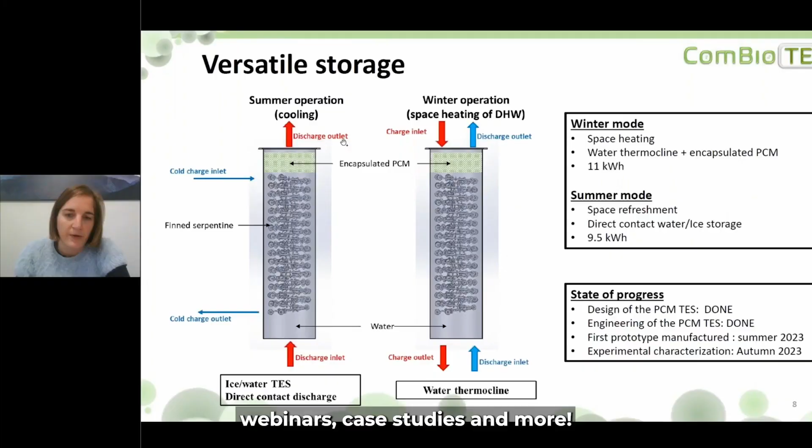Every month we focus on a topic that is key to making Europe's buildings as energy efficient as possible. Exploring that, you can find the latest content such as expert talks, webinars, case studies and more. From architects and engineers to academics and policy makers, we've got you covered. BuildUp brings together thousands of registered members to reap the benefit of Europe's collective intelligence on all aspects of energy efficiency and renewable energy in buildings.

The BuildUp portal benefits from the expertise of our ambassadors. Drawn from industry and academia, the ambassadors bridge the gap between EU and national level and help shape our editorial content. Want to promote your work? BuildUp disseminates your research, projects and events through a variety of channels.

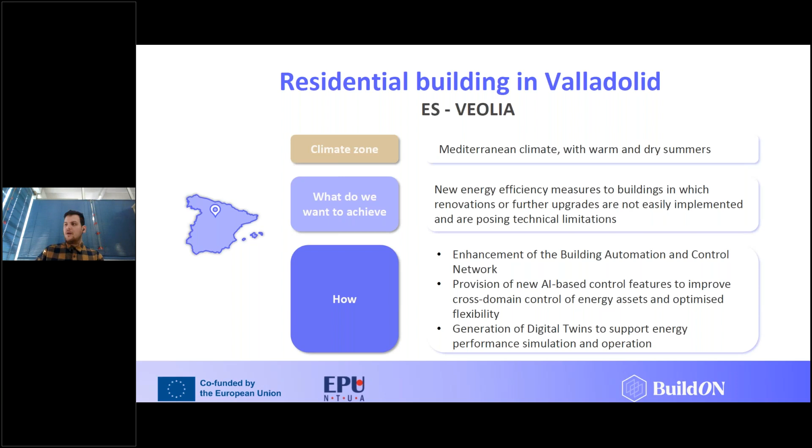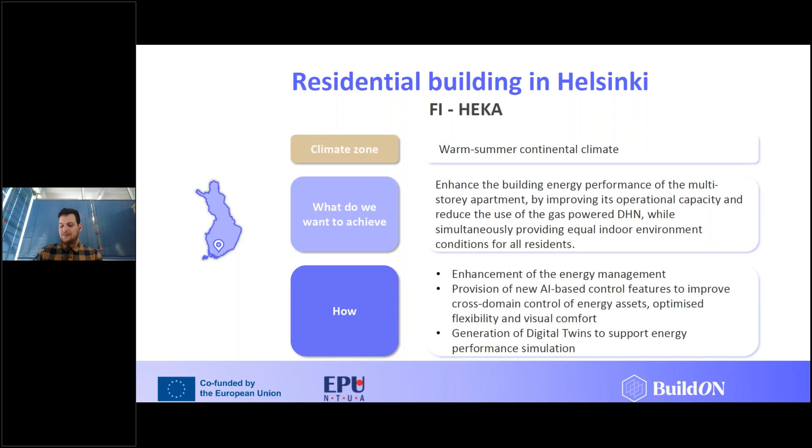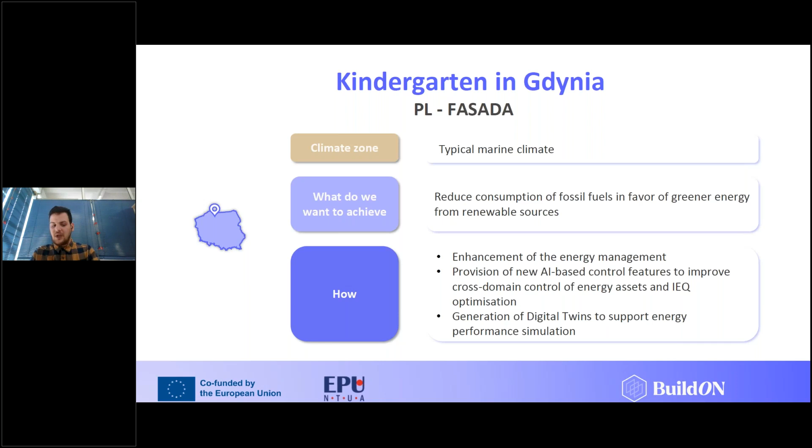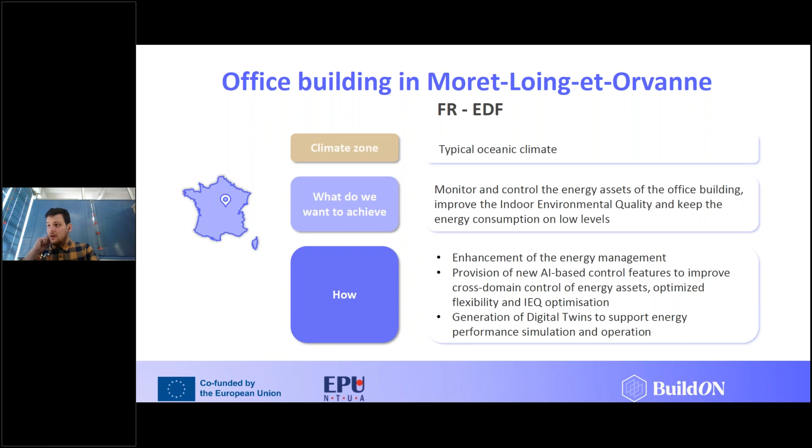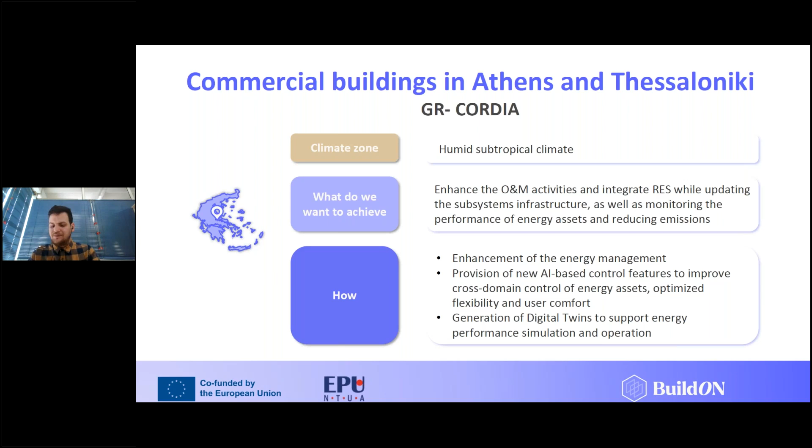A final example to make this easy: the energy profiling service is going to be deployed in each pilot. It's horizontal, but it has to be different with respect to the use case, the typology of the building, the stakeholder, the needs, the requirements. That means we cannot provide one service and that's it. We need to make it somehow 5 different services within the big service, and then be able to replicate it and say that this can be easily extracted, since we have a high TRL level, and can be deployed to other typologies upon the end of the project easily.

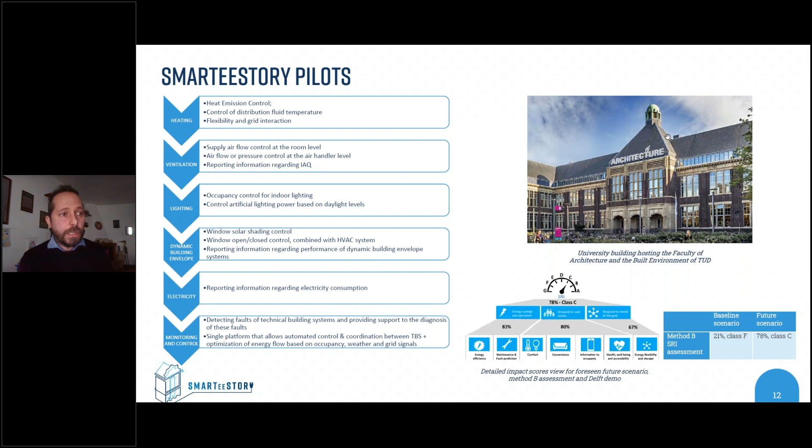All this will be orchestrated by our monitoring and control system. A specific optimization algorithm will be developed that takes into account all those instances, in order to find the best solution that is, from one side, economically viable, and also takes into account the comfort conditions of the end users.

The same will be done for the High Court of Justice in Granada. Applying the same methodologies, we are going to move from 12% class G in the baseline scenario to 72%, class C, in the future scenario, addressing five domains: heating, cooling, lighting, electricity, and monitoring and control.

As for this demo case, the physical intervention in the High Court of Justice in Granada will address both the heating and cooling system, currently provided by a centralized heat pump that can provide both heat and cool via air handling units. The idea is to develop optimization algorithms that take into account the different perspectives and needs of the users working there.

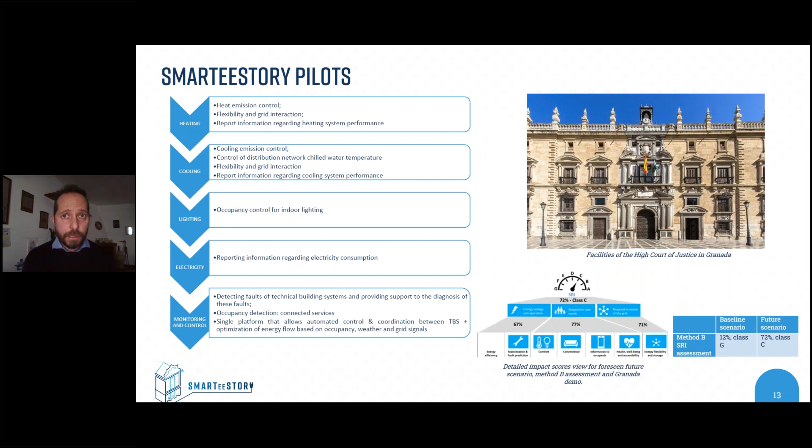This will provide a sort of flexibility to the systems that is quite important for the final SRI calculation. Lighting and electricity will also be included in this analysis and control algorithms, in order to have the end users' quality of working enhanced.

We will work on the heating domain with the possibility to control the radiators via thermostatic valves, but also the possibility to control the ventilation system that provides not only fresh air but also heated and cooled air. The cooling and heating system will be connected to the ventilation system to provide heat and cool to the users, to the workers in the building.

We will have some metering of the domestic hot water consumption, as well as for the lighting system. We will have sensors to detect the level of lighting within the different rooms of the building in order to control them properly.